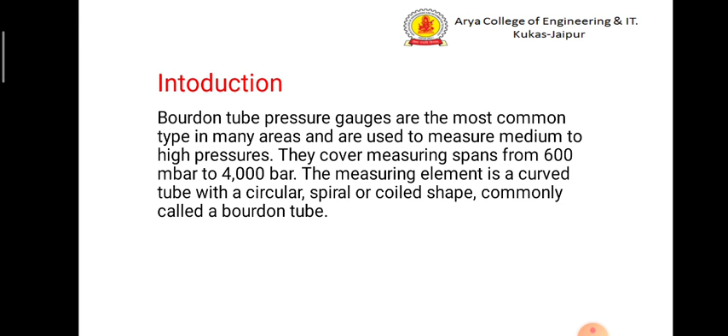The measuring element is a curved tube with a circular, spiral or coiled shape, commonly called a Bourdon tube. Basic principle of Bourdon tube. When an elastic transducer Bourdon tube is subjected to a pressure, it deflects. This deflection is proportional to the applied pressure when calibrated. When pressurized, a flattened tube tends to straighten or regain its circular form in cross section.

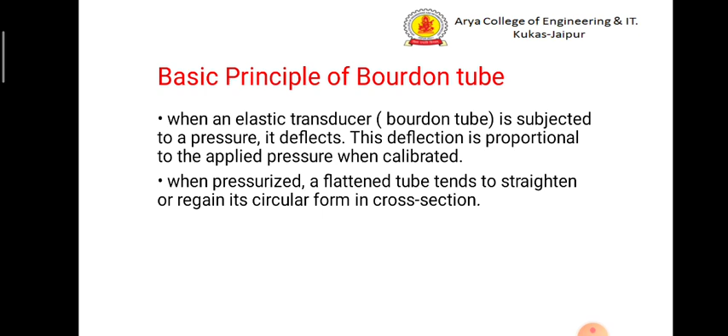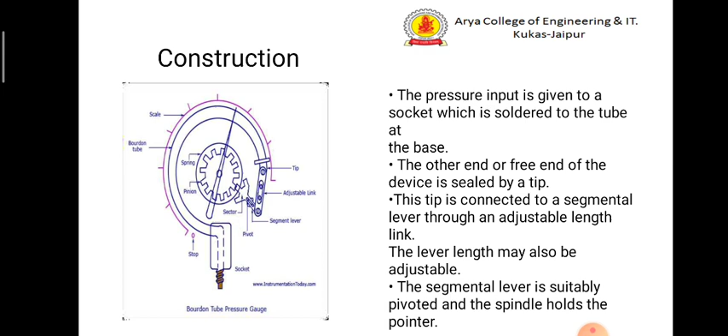Construction. The pressure input is given to a socket which is soldered to the tube at the base. The other end or free end of the device is sealed by a tip. This tip is connected to a segmental lever through an adjustable length link. The lever length may also be adjustable. The segmental lever is suitably pivoted and the spindle holds the pointer, and the construction is shown in the figure.

A hair spring is used to fasten the spindle to the frame of the instrument to provide necessary tension for proper meshing of the gear teeth and thereby freeing the system from backlash. Any error due to friction in the spindle bearing is known as lost motion. The mechanical construction has to be highly accurate.

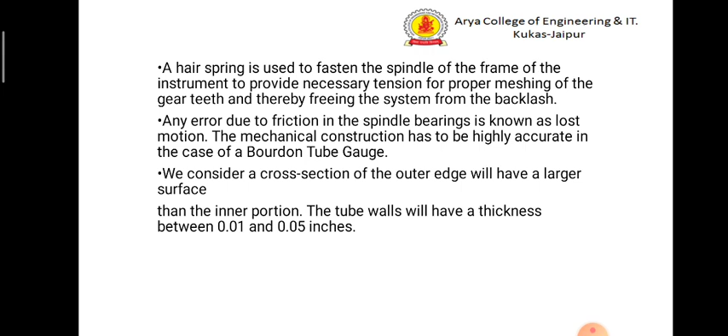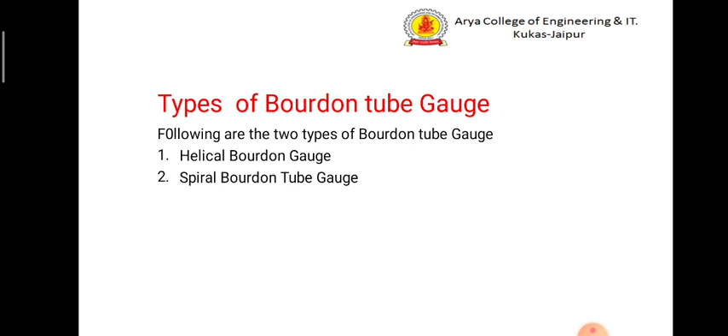In the case of a Bourdon tube gauge, we consider a cross section where the outer edge will have a larger surface than the inner portion. The tube walls will have a thickness between 0.01 and 0.05 inches. Types of Bourdon tube gauge. Following are the two types of Bourdon tube gauge. First is helical Bourdon tube gauge and second is spiral Bourdon tube gauge.

First, helical Bourdon gauge. Helical is a Bourdon tube wound in the form of a helix. It allows the tip movement to be converted to a circular motion by installing a central shaft inside the helix along its axis and connecting it to the tip. The tip movement becomes a circular motion of the shaft. A helical Bourdon gauge is shown in the figure.

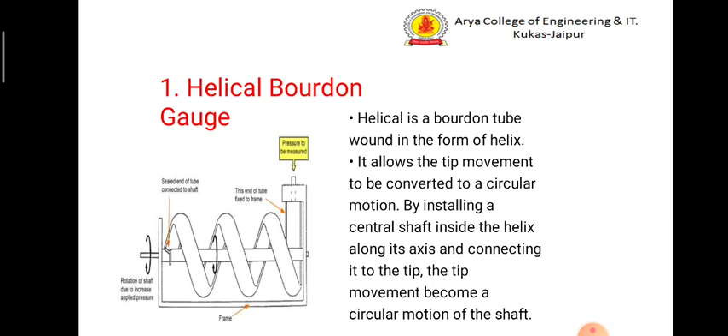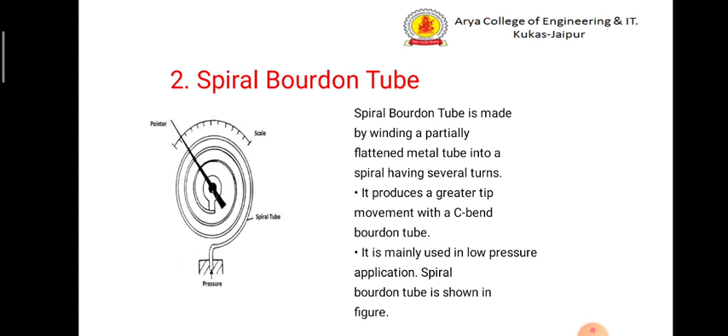Second is spiral Bourdon tube. A spiral Bourdon tube is shown in the figure. A spiral Bourdon tube is made by winding a partially flattened metal tube into a spiral having several turns. It produces a greater tip movement than a C-bend Bourdon tube. It is mainly used in low pressure applications. A spiral Bourdon tube is shown in figure.

A standard Bourdon tube pressure gauge and Bourdon tube pressure gauge with increased corrosion resistance. The standard gauge is suitable for liquid or gaseous media which are not highly viscous or crystalline, for example, copper alloy. The measuring range covers 0.6 to 1000 bar. And then second, Bourdon tube pressure gauge with increased corrosion resistance, stainless steel. They are suitable for the measurement of pressure from -1 to 7000 bar.

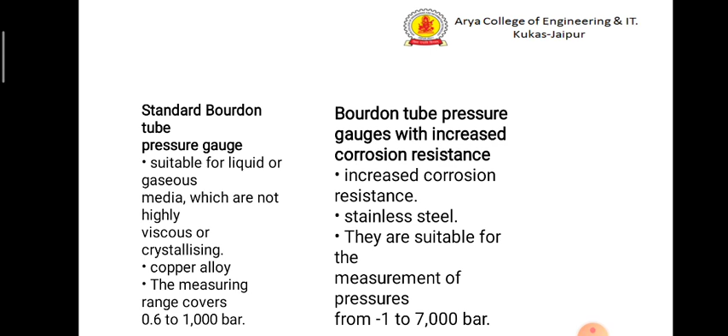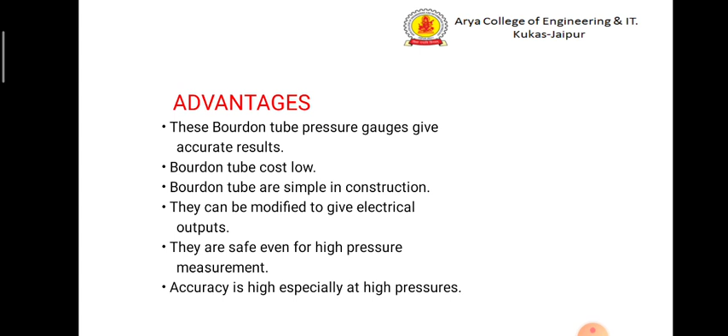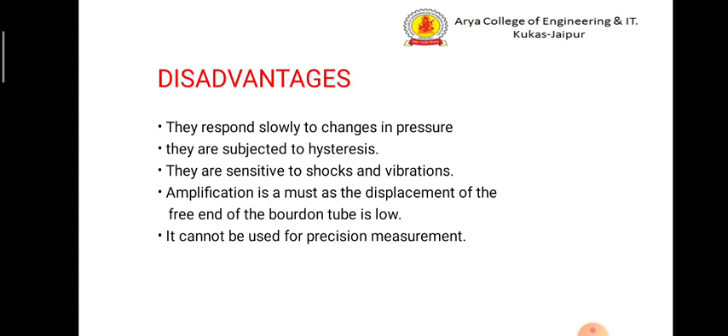Disadvantages: they respond slowly to changes in pressure. They are subjected to hysteresis. They are sensitive to shocks and vibrations. Amplification is a must as the displacement of the free end of the Bourdon tube is low. It cannot be used for precision measurement.

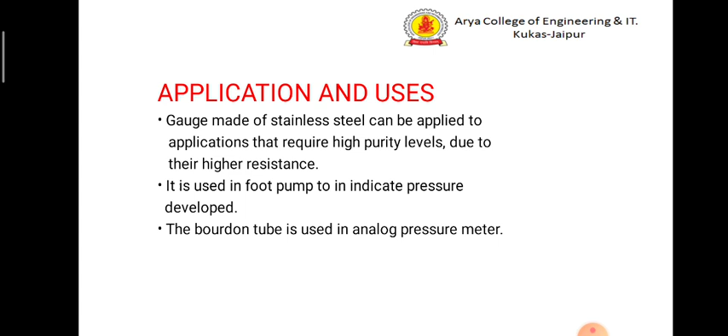Applications and uses: gauges made of stainless steel can be applied to applications that require high purity levels due to their higher resistance. It is used in foot pumps to indicate pressure developed. The Bourdon tube is used in analog pressure meters. Common applications: machine and plant engineering, gas distribution, aerospace, automotive, medical or general industries.

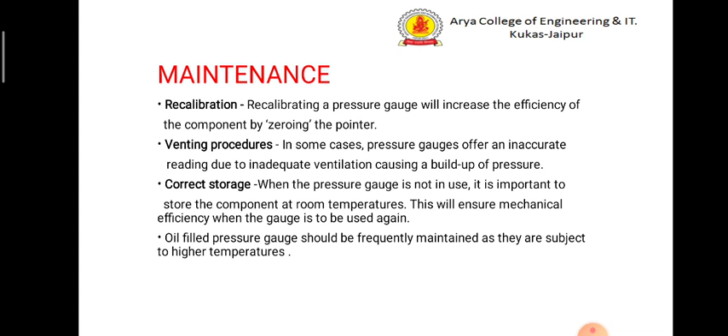Maintenance: recalibration. Recalibrating a pressure gauge will increase the efficiency of the component by zeroing the pointer. Venting procedure: in some cases, pressure gauges give an inaccurate reading due to inadequate ventilation causing a build up of pressure. Correct storage: when the pressure gauge is not in use, it is important to store the component at room temperature. This will ensure mechanical efficiency when the gauge is to be used again. Oil filled pressure gauges should be frequently maintained as they are subjected to higher temperature.